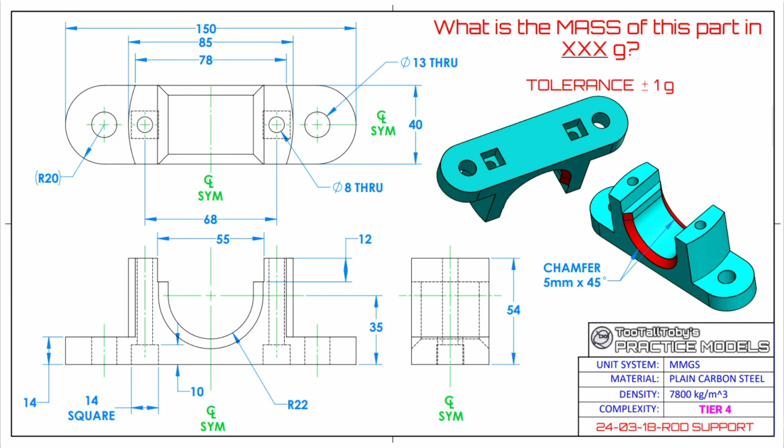We'll define two rectangles with the 78 and the 85 millimeter widths. From that, these two rectangles would basically form this inner small rectangle, which I will use a 3-point arc to define that curve.

Once I do that, I'm ready to extrude. So once I extrude everything, I will look at the side profile. Basically we just need to define this kind of rounded U shape over here.

We will use the circle to define the main U shape, but we will start off from the bottom and then offset it by 35 millimeters as per the drawing. Then also using the offset tool, we will offset it to get that outer U shape as well.

From that, we just need to select all of the empty space from the curves and then do an extrude cut to get that main shape.

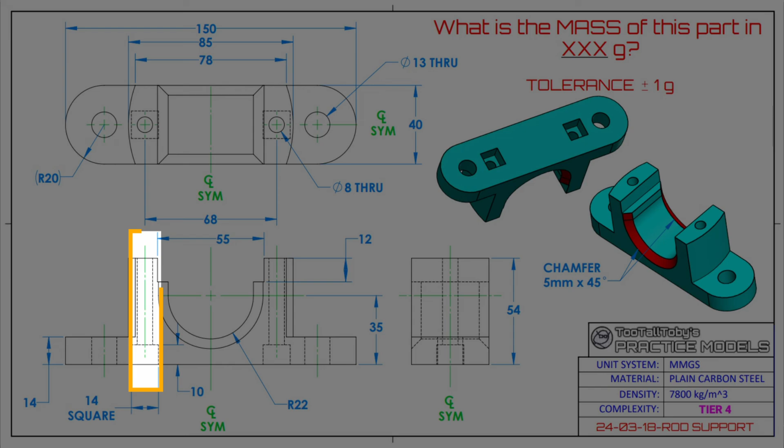After that, it's just adding the details, so adding the 5 millimeter chamfer and then also these square through holes. That will be the end of the model.

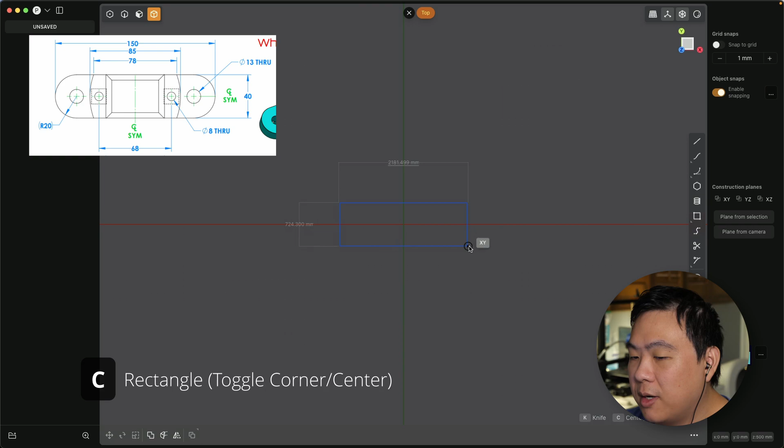Here we can select the corner rectangle, click on the origin, press C to switch it to a center rectangle, and press tab. I'm going to enter in 150 for the width, and then for the height, it's given that it's 40, then enter twice to confirm.

I'm going to press / to zoom in so we can see what we're dealing with. Again, in order to get these rounded edges, we're going to just take this curve and add fillets to them. With this curve selected, I'm going to press B for fillet, D for distance, and then I'm going to enter in 20 for the radius, then enter twice to confirm.

Right from the start, I will also define this through hole, so when I extrude, I don't need to do an additional cut operation.

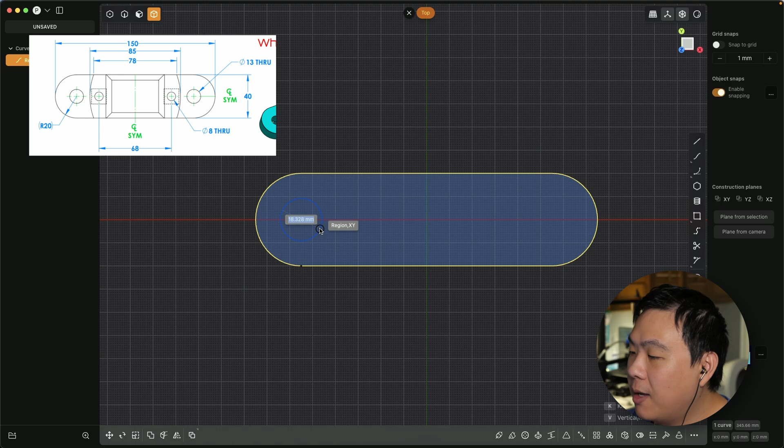Using the center circle tool, I'm going to select the center on the left, click, press tab, and then we're given that the through hole is 13 millimeters. So I'm going to enter in 13, then enter twice to confirm.

Now we've got to define this arc. In order to do that, I'm first going to define two reference rectangles. Using the rectangle tool again, press on the origin, press C to switch it to the center rectangle tool. Here we only really need to define the width.

I'm going to press tab and enter in 85, and then making sure the height, I'm just going to snap it to the existing height of the base. That's our first reference rectangle.

I'm going to repeat this operation now but enter the second reference rectangle. Again, press tab, enter in 78, and then snap onto the existing base as our height. This is what I'm talking about when I say it forms this small rectangle over here.

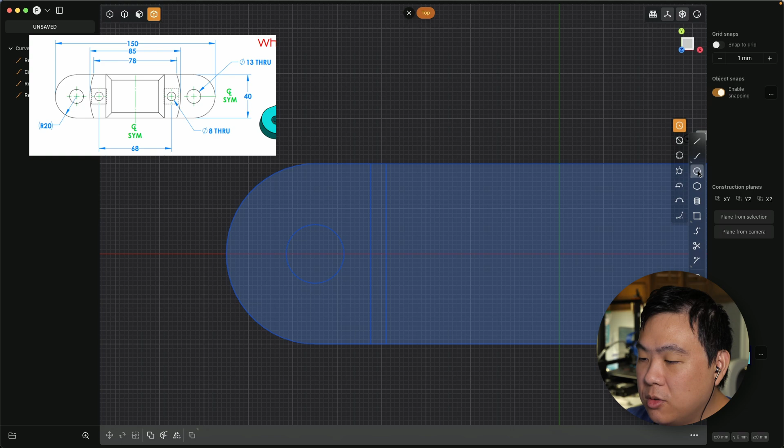Here I'm going to use the 3-point arc. If we go over to where the center circle tool usually is, one of the options is a 3-point arc. So using the 3-point arc, I'm going to select the first point, second point down here, and then the third point in the middle.

And that gives us that arc shape. This is pretty much all we need, so I'm going to delete those two reference rectangles now. This model is pretty symmetrical, so I'm going to opt to just define it from one side and then mirror at the very end.

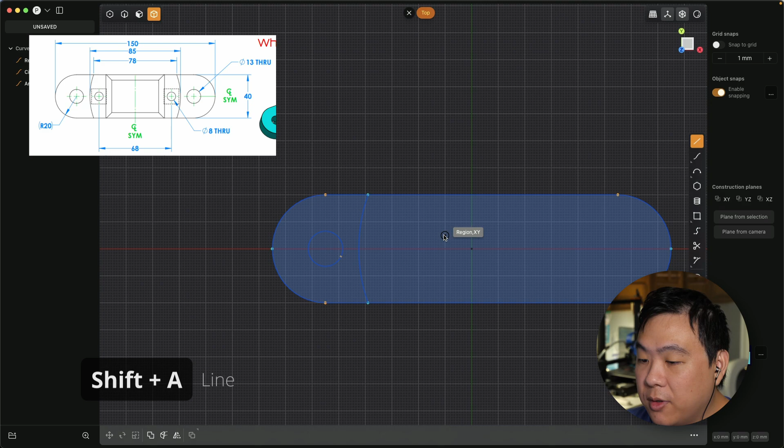Using the line tool, I'm going to split this down the y-axis and right-click to confirm. And now I'm ready to extrude.

Looking back on the side profile, the base is 14 millimeters. So I'm going to take this face, press D for distance, enter 14, press minus so I can get in the right direction, and then enter twice to confirm.

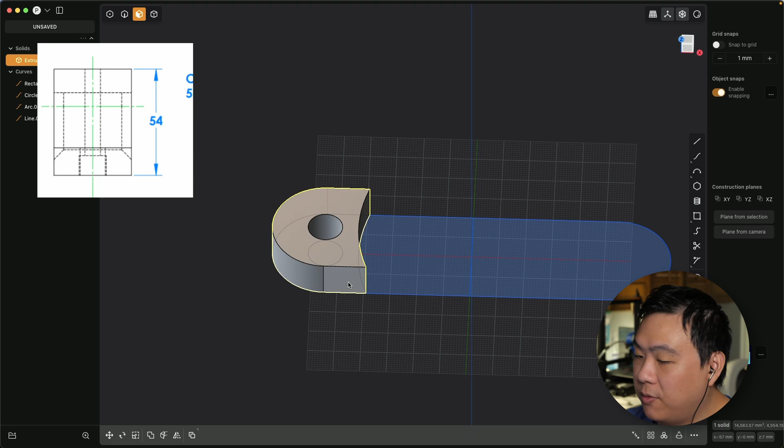Now this inner part has a height of 54. I'm going to select this face, press D for distance, enter minus 54, and that gives us that. With these two extruded, I'm going to press A to select everything, Q for Boolean, Q for union, then right-click to confirm, and switch over to the front view.

I can now select these existing curves and delete them since I don't need them anymore. But in order for me to have curves to work with as reference, I'm going to project this existing solid as a curve.

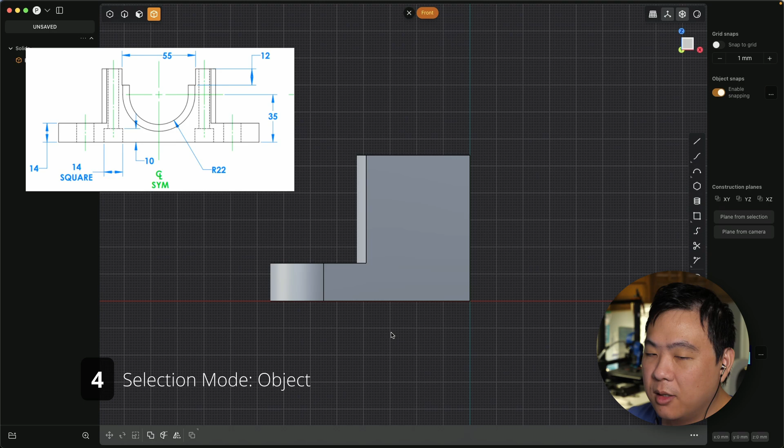To do that, I'll select this solid and run the alternative duplicate command. The hotkey for that by default is Option D, but you can also find it in the search menu. I'll press F to enter the search menu, and here, the first option is alternative duplicate. I'm going to select that.

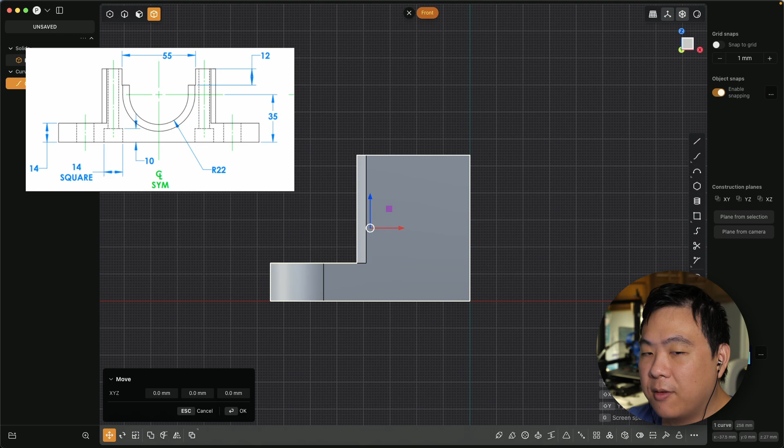You have to be in the front perspective because that's what we're working with before we run this command. Once I run that, it creates this curve. I can now hide the solid using this eyeball on the left-hand menu, and now we have this curve that we can work with.

As before, we have this radius of 22 kind of arc. I'm going to define that using a circle. Using the center circle tool, we'll start at the bottom because we're given a 35mm offset from the bottom, so we start where we need to offset from.

Using the center circle tool, I'm going to start at the origin, click, drag, press tab, and the radius is 22, which means the diameter must be 44. So I'll enter in 44.

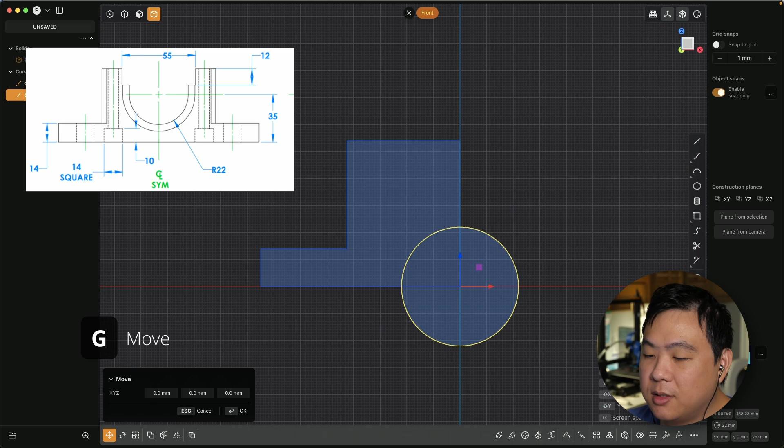Now we need to offset it upwards by 35mm. I'll press G to enter the move tool, Z to lock into the Z axis, and enter 35. Here we know this is a kind of U shape, which means there's a line that's tangent to this circle.

So here I'm going to create a vertical line. With this line selected, I'll press G for the move tool, F for freestyle, and select this end. Then I'm going to drag it over onto the circle until I get the tangent tooltip. Here we go, tangent. I'll left click, then right click to confirm.

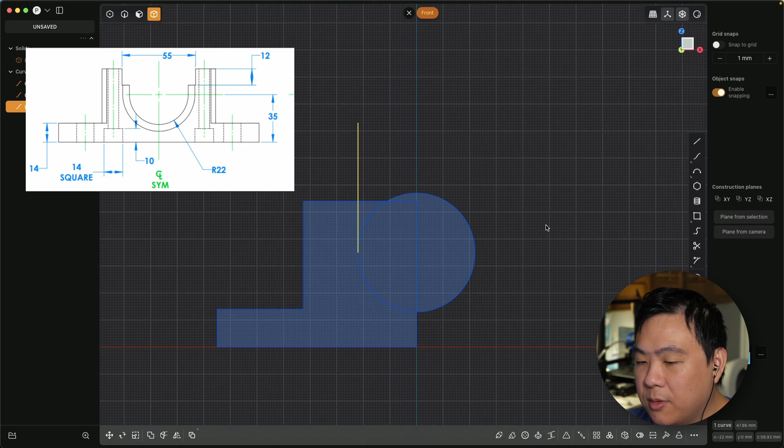Now I'm going to use the trim tool to trim away parts of the circle we don't need anymore, so we don't need this top part. This is two curves right now, so using the edge selection mode, I'll select both of these and press J to join, so now it's one curve.

We're going to use the offset tool to define the outer U shape. To get the distance to offset, we know the radius is 22, and from the drawing on the side, the end to end is 55. If there was another circle defining this outer shape, the radius would be 55 divided by 2, which is 27.5. Then the difference would be what we need to offset.

With this curve selected, I'll press O for offset, D for distance. As I mentioned, 55 divided by 2 would be the radius, which is 27.5.

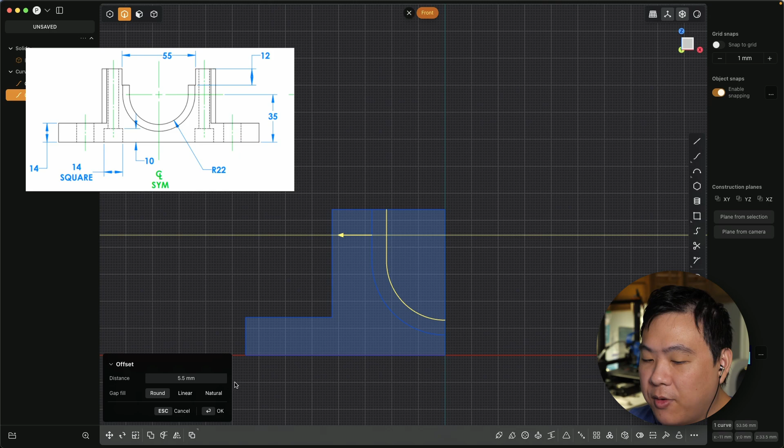Then we have this inner radius of 22, so we subtract 22 from it, and that's the correct offset we need. So 5.5mm is the offset that we need to define that outer U shape. Enter twice to confirm.

Now we're given that this U kind of ends via a 12mm offset from the top. So I'm going to draw a line from the top, press G to enter the move tool, Z to lock into the Z axis, enter -12, and enter twice to confirm. That's pretty much all we need.

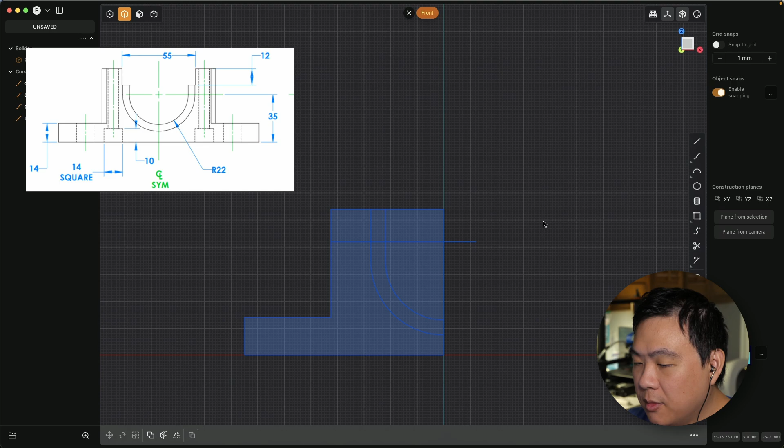Essentially right now our shape consists of this entire block. I'm going to pre-select these three faces, unhide our main solid, press D for distance, drag all the way out, and press tab so it cuts from both sides. Left click, press W for difference, select our main solid to do the extrude cut from, and right click to confirm.

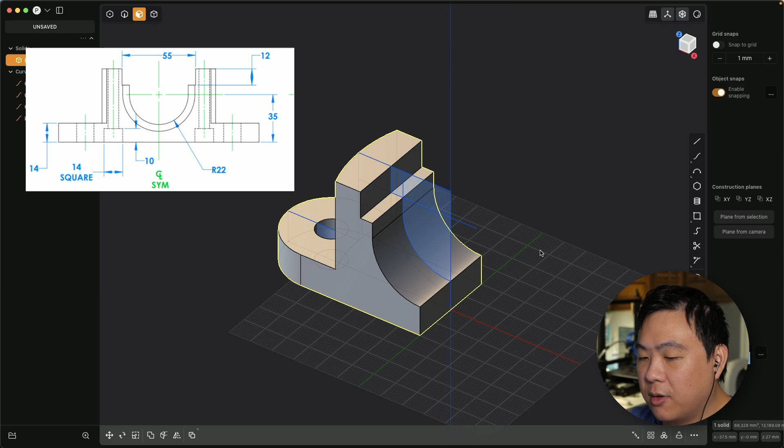Now I can select all of these curves and delete them. We don't need them anymore.

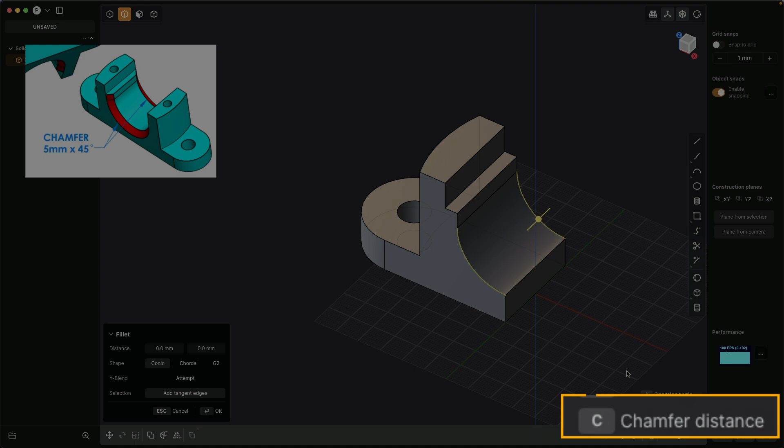Let's add that detail in now where there's a 5mm chamfer at 45 degrees, which is kind of the default behavior for the chamfer tool anyway in Plasticity. So all I need to do is switch into edge selection and select both of these edges. Then on the bottom right, we want to specify a chamfer distance of 5mm. I press C for chamfer distance, enter 5, and enter twice to confirm.

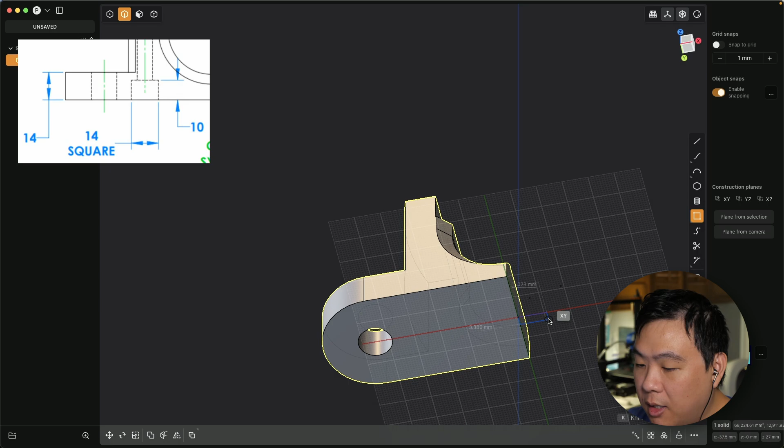The last thing we need to do is that square kind of hole from the bottom. I'm going to rotate the camera a little bit and use the rectangle tool again, making sure I select on the middle and from the origin and drag outwards. Press C to switch to a center rectangle tool, then press tab, enter 14 for the width and 14 for the height, and enter twice to confirm.

Similarly, I'm going to draw a circle over here. Here the through hole is 8, so press tab, enter 8, and enter twice to confirm.

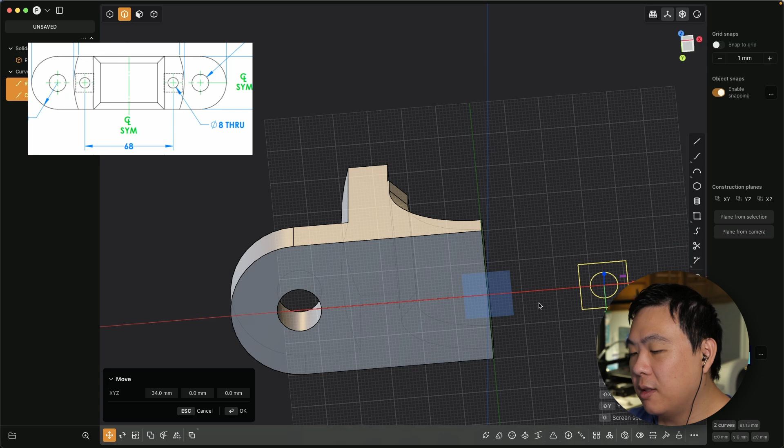Now we just need to move it into place. Here we're given that these holes have an offset of 68 from hole to hole, so we take 68, divide that by 2, since we're working with only half of the geometry. Take both of these curves, press G to enter the move tool, X to lock into the X axis, enter 68 divided by 2, and since it's going the wrong direction, I press minus, which puts it into the correct spot, then enter twice to confirm.

Using the edge selection mode, I'm going to first select the circle, press C to enter the cut menu, and cut through this main body, right click to confirm. Here it selects the cylinder as a result of the cut, so I press X to delete it.

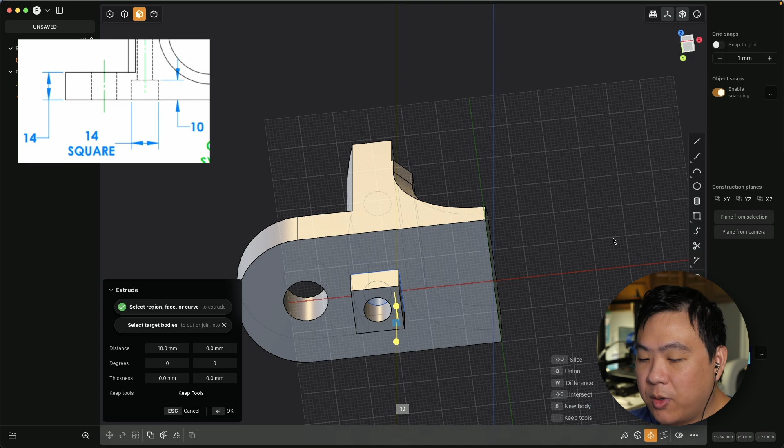To finish things off, we're just going to select this rectangle now, press D for distance. Here it says it is inset by 10 millimeters, so I enter 10. It's going the wrong way, so I press minus, then press W for difference, select our main solid, and right click to confirm. That's pretty much it. That's half of our model.

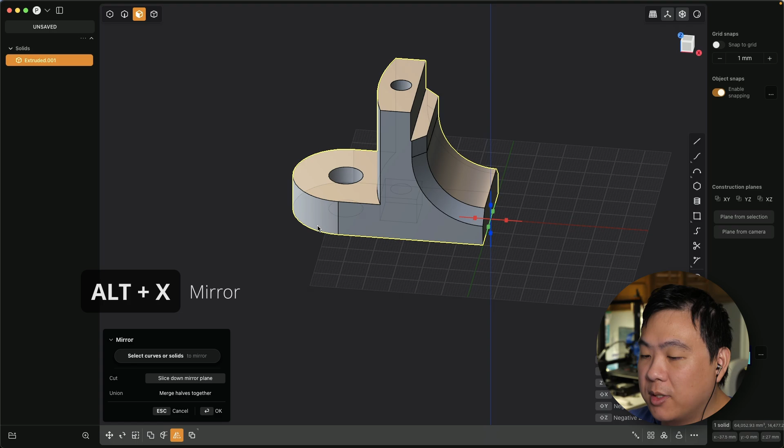I can delete these existing curves now. On the left-hand menu, select the half that we created, press Alt-X, or you can press this button down here to mirror it and enter the mirror tool. So Alt-X, then we want to mirror it along the X-axis, so I press X and enter twice to confirm.

Now we just need to Boolean them together. With these two solids selected, press Q for Boolean, Q for union, right click to confirm, and that is our model.

So now to calculate the mass, I'm going to select the solid over here. The volume over here is on the bottom right, so let's clear that calculator.

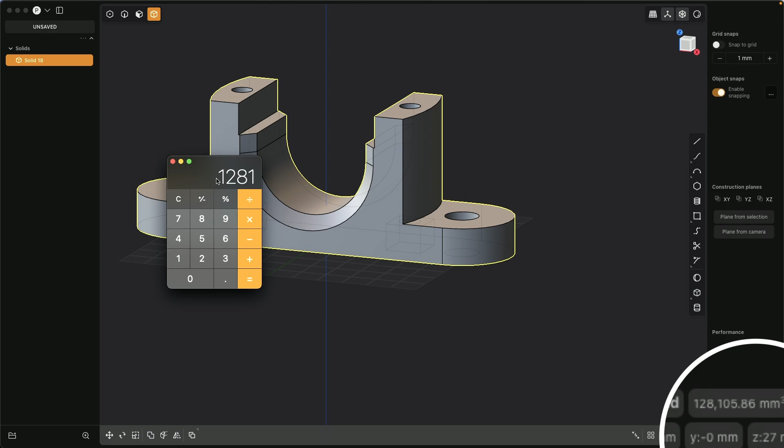I'm entering 128,105.86, and the density from Too Tall Toby is 7,800 kilograms per meters cubed. So I'm going to multiply this volume that we just entered by 0.0078 to get our answer of 999 grams. Hopefully you enjoyed this video.